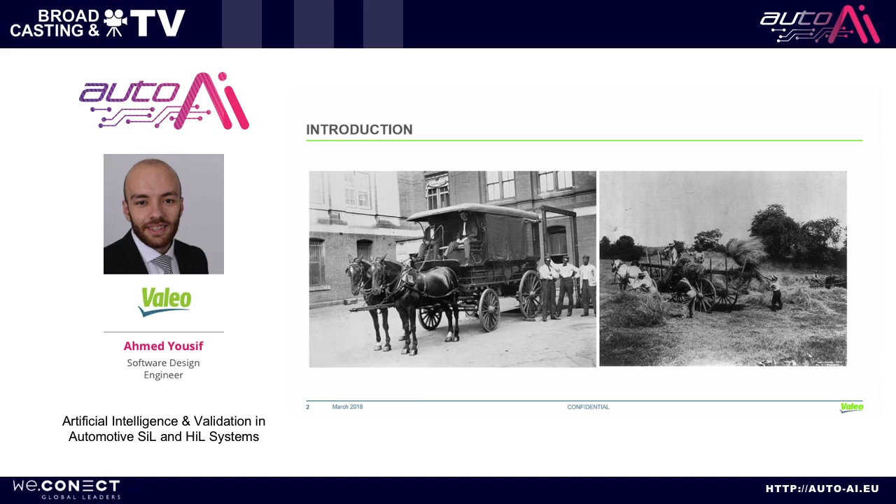So when we started transporting stuff, we go from place to another, we were using horses. With more demand that we got, we needed more horsepower. So what Benz did, he virtualized the horsepower, so what we called a car. It was 1886, south of Germany.

And not long time ago, we were driving in couple. So you were going with your husband, your wife, your girlfriend, and she or he was always nagging about going to the bathroom, coffee, navigating, waking you up. And with technology, we virtualize the co-driver or your wife, and now the GPS is navigating you, other systems are waking you up, telling you to take a rest, and some other systems. And with further development, I would say rapid development, we are going to what we called a full autonomous driving.

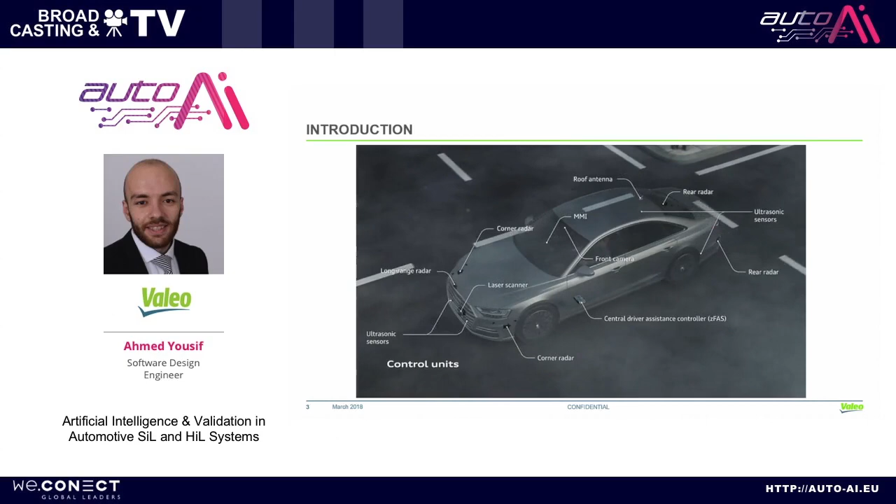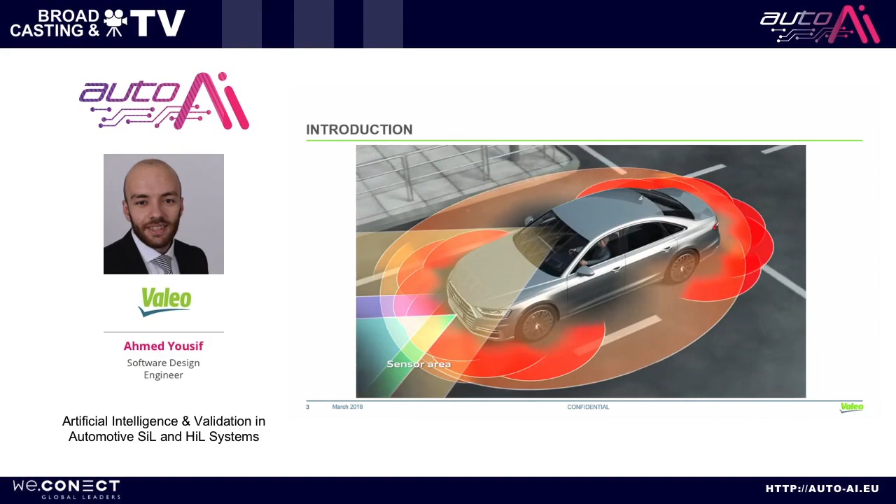So this is a video from Audi.AI, the 2018 one. It has multiple sensors, long range, short range, laser scanner, ultrasonics, cameras, MMIs, roof antennas, and GPS. And it could reach level 4 autonomous driving. It was tested for that. I would say 3.5. It can navigate, it can change the lane without a driver attention. It can also detect traffic jams and so on. I will not continue it because it's too long.

So what are the software challenges? As we know, we have more than 25 driving assistance systems, which are basically, the objective is to increase the safety of the driver and the road. As I said, there are long range, short range, radars, LiDARs, ultrasonics, and this is what we call sensor fusion.

A presentation yesterday was saying that sensor fusion is in the gray area. It is true, because we need to really validate it, because to ensure the functionality, we need to extensively test the functions which have this sensor fusion. And this topic is, as we know, ISO 26262, which is on the other side of this foyer. And in order for us to test such functions, we need to use dynamic testing, or we use the model-based testing. And the idea behind Audi.AI is also to test the artificial intelligence algorithms.

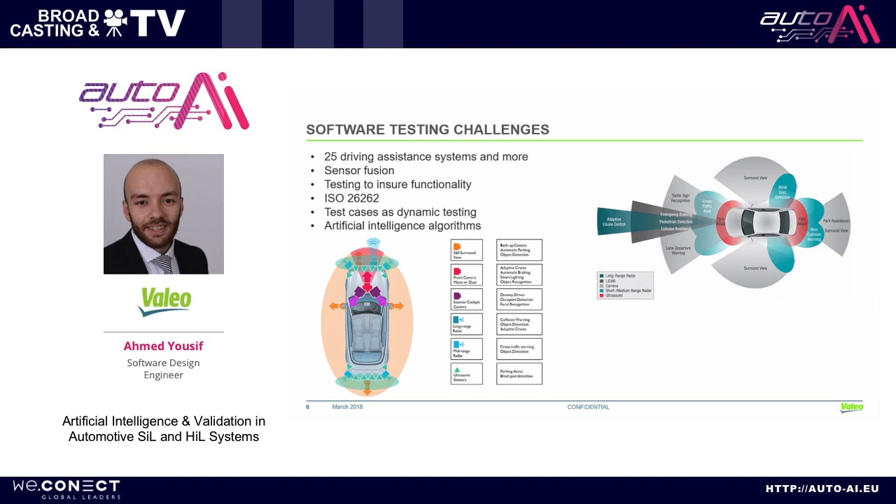So what are the challenges? First is cost. According to Ford, a prototype costs 250,000 euros, only to develop and manufacture one car. Gas, human resources, depreciation are more overhead on this. The time consumption regarding testing in an autobahn, highway, the manual testing, the automatic testing, and so on. And last, the more human resources we need, the more time we consume, the more cost and the more budget we need.

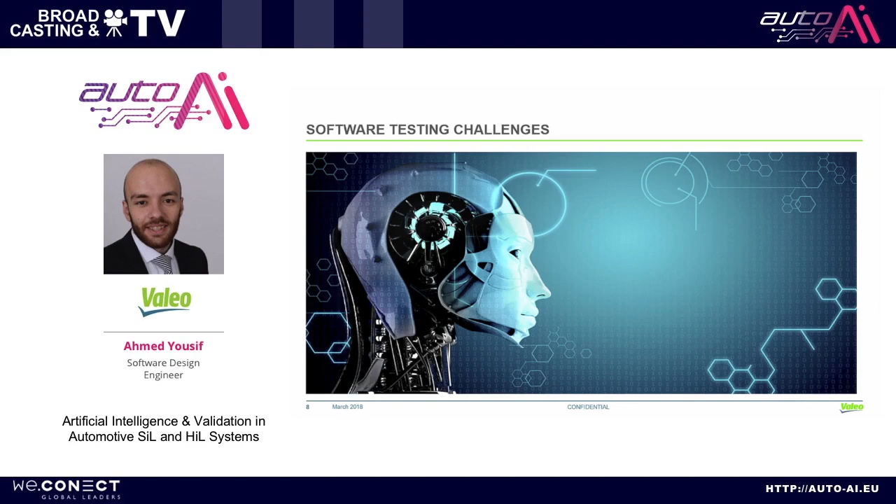In addition, accidents such as NCAP, accidents on the highway, the same what happened 8 months ago with Uber. These are all challenges which we are facing, and the last, but not least, is the artificial intelligence algorithm. Now companies are challenging themselves and others to drive as many miles as they can. Waymo in July 2018 said they could drive 8 million miles, and now they are counting. I think they could reach 9 million very easily.

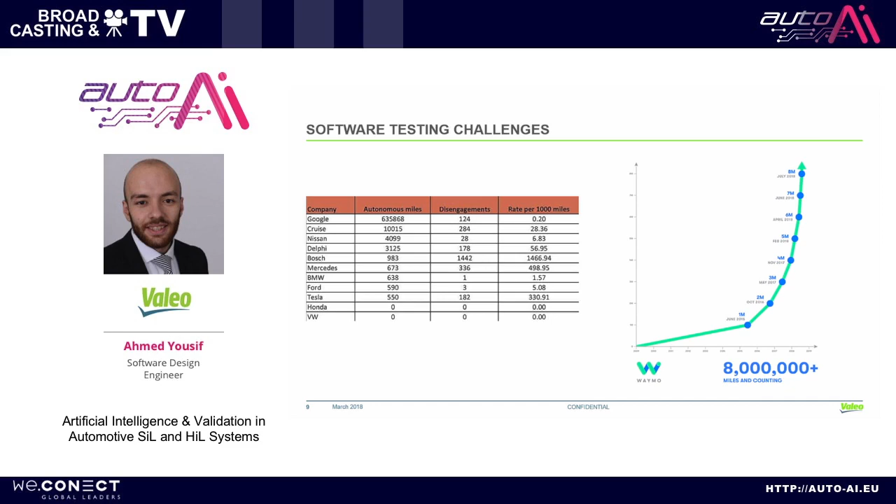And in order to face this challenge, we said, okay, why not? We can virtualize everything. The environment, the ego vehicle, the driver, the co-driver, the algorithm, and the scenario. So this is the solution. First, we developed our own ADAS model-based testing. Model-based testing means it's a tool or a platform which can generate as many test cases as possible. Why? In order to cover test cases, requirements, customer tickets, corner cases, and to ensure traceability.

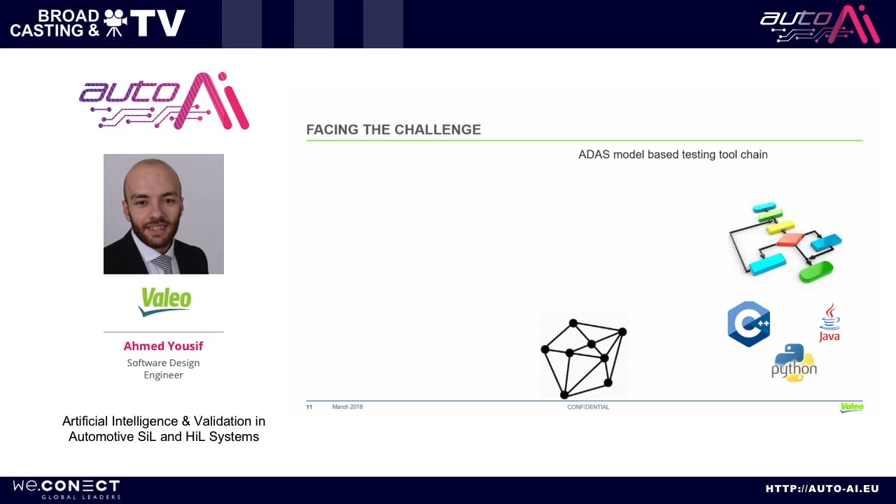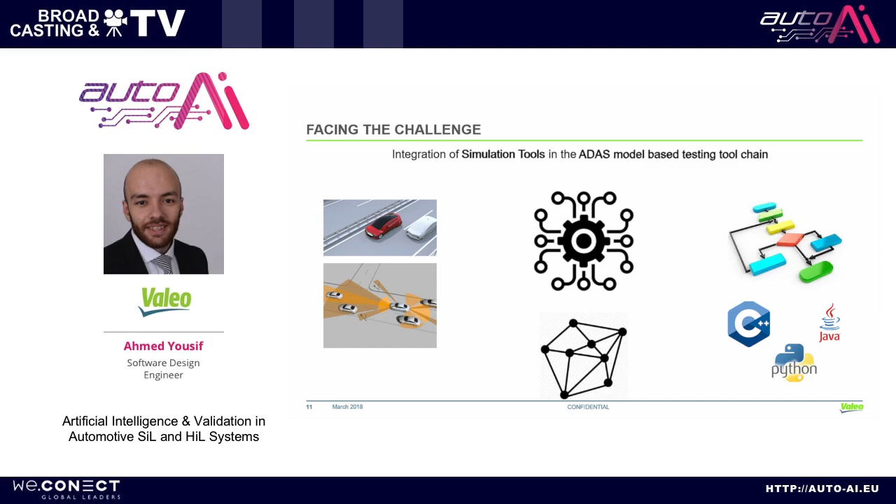On the other hand, we have the test model. The test model is the algorithm which we want to test, such as our AI algorithm or any other system, algorithm, or function we want to test. And at the end, we have the simulation tool. The simulation tool is able to simulate your ego vehicle, your surrounding, your sensors, your sensor physical model, and other scenario parameters. And integrating all of them gives us this virtual validation concept.

I will give you 3 examples of what we do at Valeo. So first, we have a model-based testing. This tool now is able to control the simulation tool. It will generate the test scenario, such as a parking scenario. It will put the right parameters, such as distance, parking slot, where is our car, and so on. And with any interface, it will just say, okay, I want a test case where the vehicle speed is X kilometer per hour. And this will be set on the simulation tool. We'll see it in the next slide.

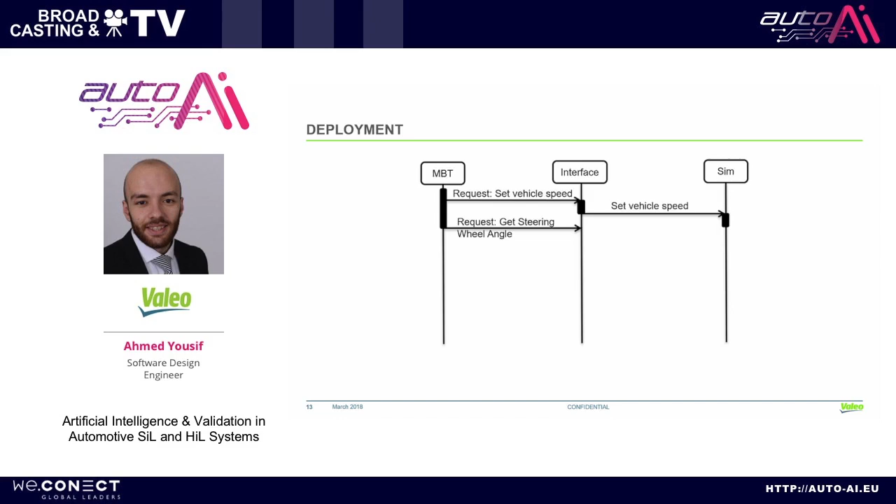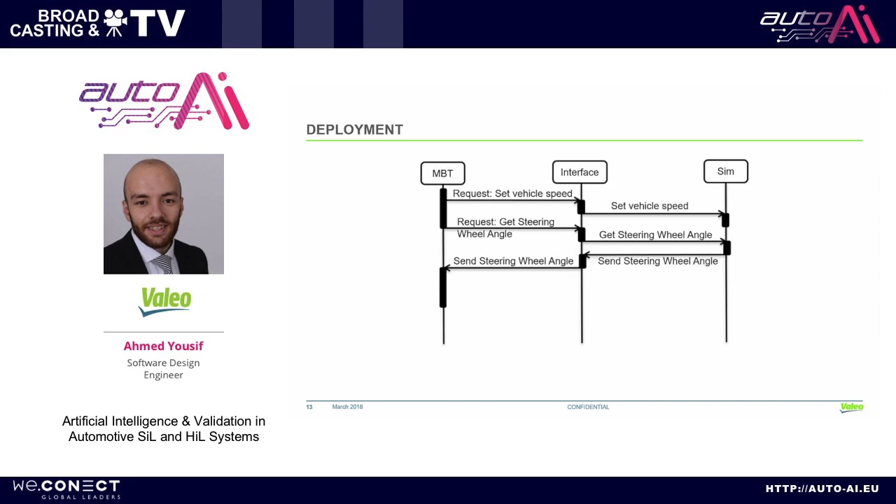And this simulation tool will react to this model-based testing. And now the test case has a parameter which says, okay, the vehicle speed is X kilometer per hour. After that, the steering wheel angle should be retrieved from the simulation tool. Now, actually, what the model-based testing is doing is building the scenario in order for us to test it on SiL or HiL. And it will send the steering wheel angle back to the model-based testing and so on. And at the end, we have a very complete set of test cases for a parking slot, as an example.

One more example is if we get not a system, but a function, such as object tracking, object classification, and so on, we generate a deterministic behavior scenario. We put them in a very, very big database, and we start feeding them to our algorithm. When we're feeding them to our algorithm, either an AI algorithm or a normal algorithm, we'll get some reactions which will enable us to study how this artificial intelligence brain works.

So let's go a bit deep in this. So what we do, we have a simulation tool. It could be ROS, it could be CarMaker, it could be rFpro, it could be any vendor simulation platform. We feed this information inside our software in the loop. It can be any real-time framework, or we could feed it to the HiL. We have our own HiL system, but it could be also dSPACE. It could be any vendor HiL.

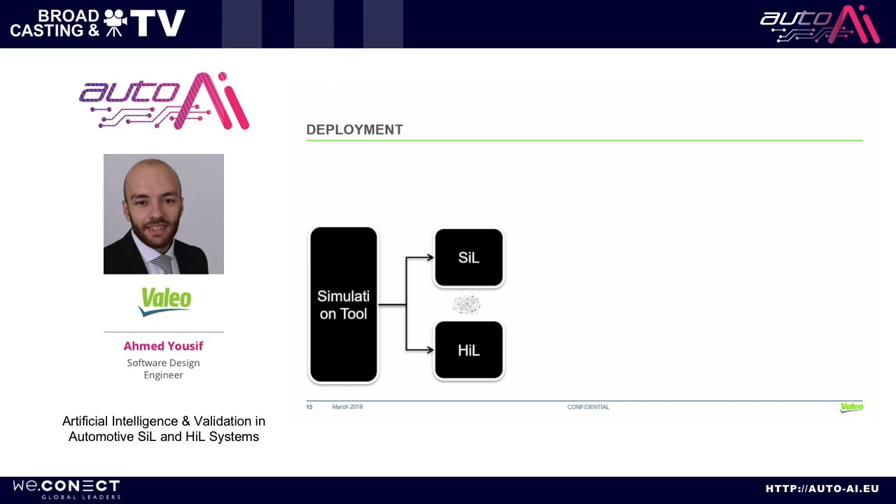After that, the report is generated, and we get, of course, two sets of outputs. One of them is a valid one, and one of them is an invalid one. The valid one can be again used as a training set. It's a new training set for your neural network. Why? Because it was successfully valid, and your neural network successfully detected your pedestrian, your parking slot, and so on.

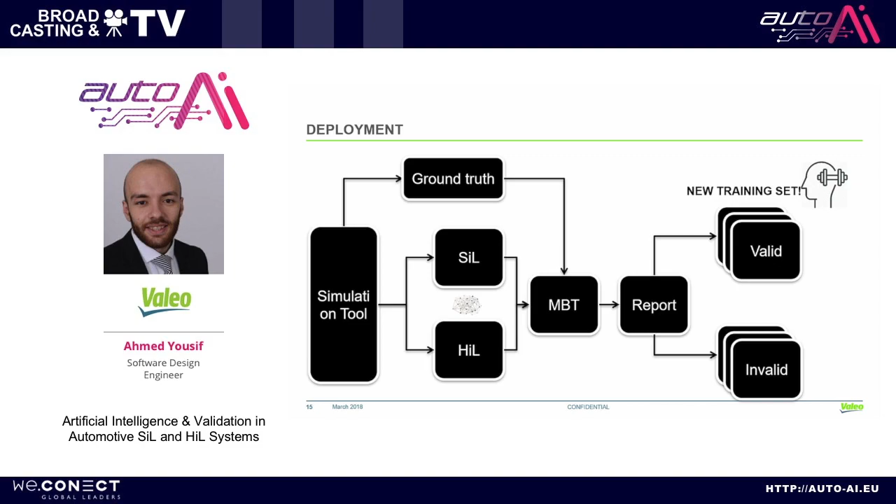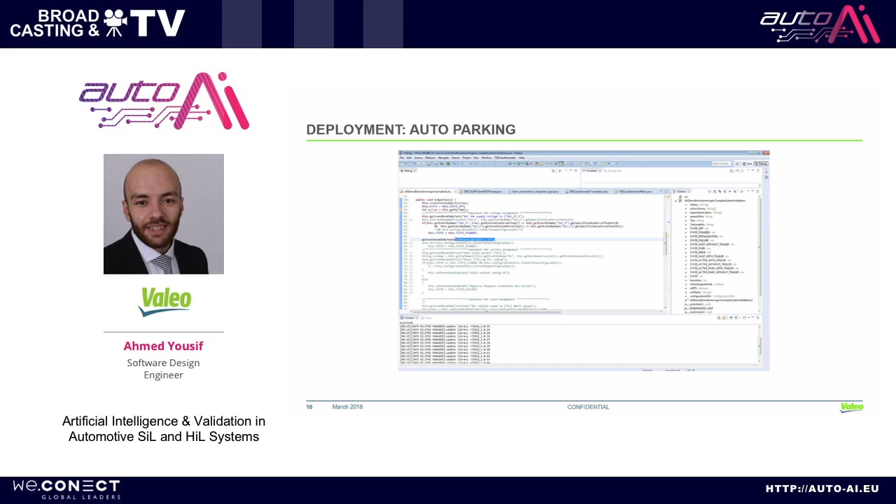And this is now what we are working on, ultrasonic and cameras, as only a proof of concept. I will show you one deployment of auto parking at Valeo. This is our own simulation tool. At first, we will just run our model-based testing and our CANoe. Our model-based testing is based on Java. It's a multi-threaded model-based testing tool which generates as many thousands of cases as possible.

And now, as we can see, we have here a curb. I just put a normal curb, and we'll see how our algorithm will detect the parking slot. So these are ultrasonic sensors, and our model-based testing is retrieving these distances. Well, it couldn't find such a slot, so the maneuver was canceled. Now what I did is I only removed the curb, and now we'll see on this attempt, it will park in one time, without reversing forward, backward, and so on.

So the first edge was detected. And now the parking slot was detected. So this is our parking slot. And it will go in a perfect S-curve in order to park in this parking slot. So this was one example of how to deploy this on an artificial intelligence algorithm.

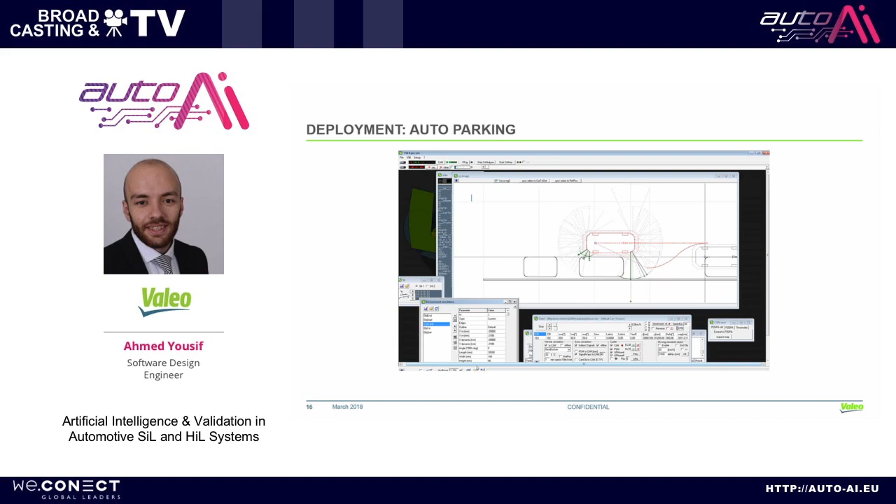But now we are working on a new concept. So this is a tool. It is CarMaker. Now, what we are concentrating on is to validate the neural network algorithm. But why don't we do the other way around? Why don't we train our validation toolset to validate a normal algorithm? And this is what we did. So on a simulation platform, you can actually develop a sensor model which behaves like or depicts your sensor. For instance, a laser scanner, a LiDAR.

So what we did, we actually trained our sensor model to behave the same as our laser scanner, which means the hardware limitations are there, the software limitations are there, everything is there, and we can see on this screen that we generate the point cloud as it's real. And now what we do is we are testing a normal algorithm, not an artificial intelligence trained algorithm. How can we do this? We try to record as many traces as possible and train a sensor model to behave as the laser scanner, and not the other way around.

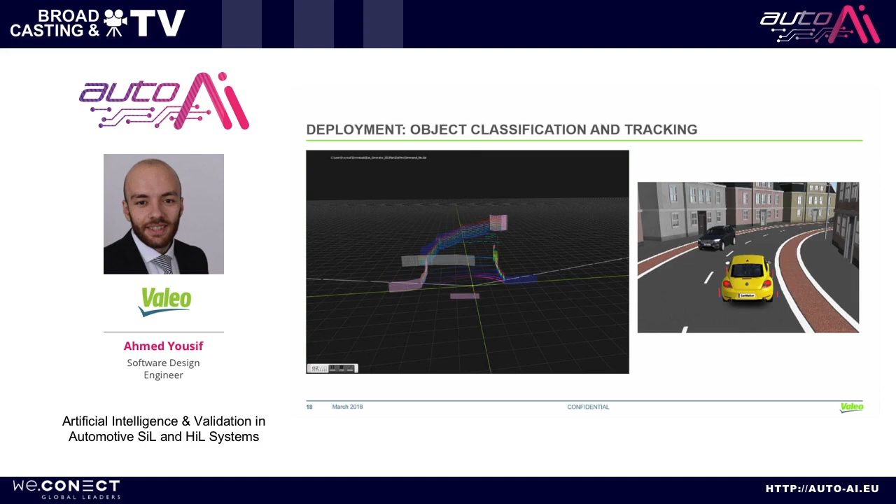And this was the result behind this. This was in very perfect weather. So we can see the ground reflections are nice, everything is nice. And then when we go to foggy or rainy weather, we get such, I don't know if you can see this. We get some ground reflections. I don't know if you guys can see this, but we can see that the ground reflections are different. We can see the lane markings are different. We have some reflections there because it's rainy, and so on.

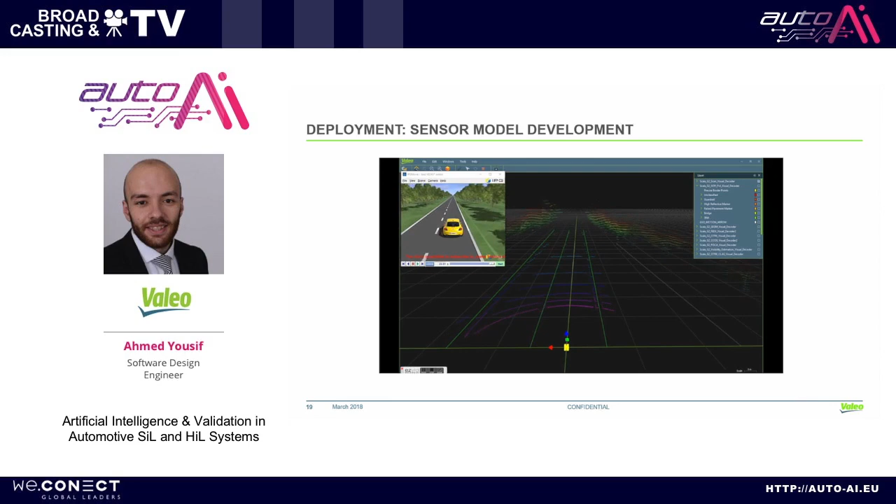So this is now the trend that we are trying to drive, that we don't only need an algorithm or a system which is trained. We also need a validation platform which is trained. And basically I wanted to show you what we are doing, what is our trend in our team, and what we are trying to do. So after all, the summary is we should always develop our sensor model and at the same time test it, deploy it again, and we go through this loop.

So the V model is, I would say, not anymore always valid. It is sometimes valid, but the iterative waterfall is now more valid, or this is the trend we are trying to go through, because as we saw in the last slide, every time we have a valid data set or a training set, we can actually train another sensor, another ECU, another function to behave as a new neural network.